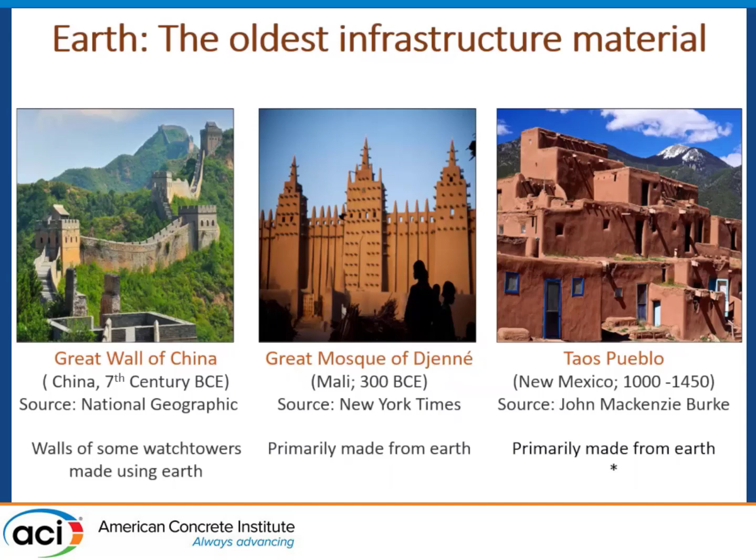Then we have Taos Pueblo, which is a community in New Mexico, and this also was made entirely with earthen materials. What's really cool about these structures is that, considering their long age, they are all still around and still presently in use. Particularly with respect to Taos Pueblo, it's considered to be one of the longest continuous use sites for humans in North America. So that's showing you the testament to the resiliency and strength of earthen materials, which we tend not to really think about as being strong and resilient.

When we look at earthen materials, it's actually used everywhere. Just about every continent will have some type of earthen architecture. Over here, this is showing you a map of where there are regions with earthen architecture, and you can see it's pretty well distributed. In addition, earthen architecture is not just used in warm climates, as some people may think. Over here, we can see this multifamily building that was built in 1955 in Germany.

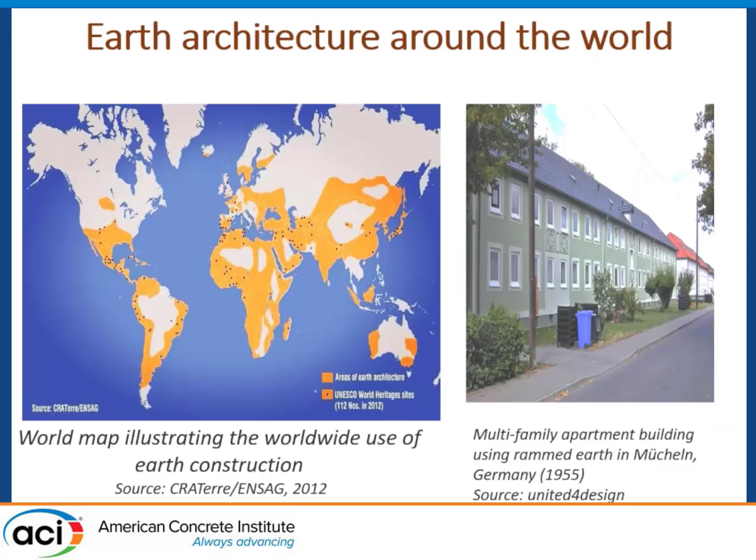When we look at earthen materials, there's many different ways that you can build an earthen building. Perhaps the one that most people are familiar with is adobe. Adobe is the type of earthen construction when you take soil, typically mixed with some sand too. You'll have it in a mold and just hand mold it.

Then we have cob, which is another type of earthen material in which you have your earth, your sand, and you also mix it with some straw. Then you have rammed earth, which is a type of earthen construction in which you have your forms built to a certain height, and then you put your soil inside of it and tamp it down, then you put another form on top, fill it with soil, and tamp it down again. A lot of architects like the look of rammed earth because you could add pigments to it and change the color of each layer, so you can have some really nice features with it.

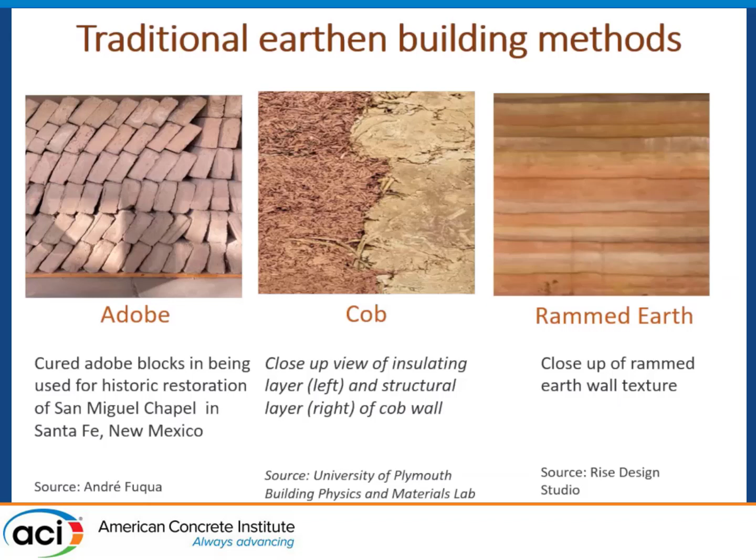Over here, this is just showing you some examples of each one of these earthen construction materials. However, over the last decade or so, there's been this renewed interest in looking at earthen materials. A lot of this has been driven by looking at trying to have economical, affordable materials with respect to housing development, to address concerns with respect to housing scarcity.

But in addition, there's a big motivation with respect to looking at how we can try to mitigate some of the effects that the building and construction industry is having with respect to climate change. And when we look at earthen materials, we see that they have a much lower embodied energy and carbon footprint than our beloved concrete.

So over here, this is showing you an example of rammed earth, which is one of the methods that I talked about before. And compared to concrete, we can see that rammed earth is going to be a fraction of the carbon footprint and embodied energy of concrete material. So this is a strong motivator, and you're seeing a lot of people who are really focused on sustainability looking at alternative materials to design their house.

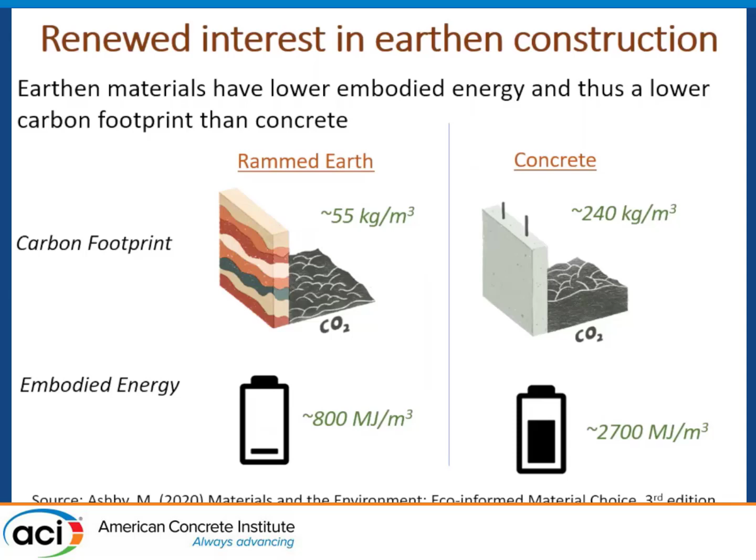This renewed interest in earthen construction has also led to a renewed interest in ways that we can manufacture earthen materials. So over here, this is showing you two examples. One is compressed earthen blocks.

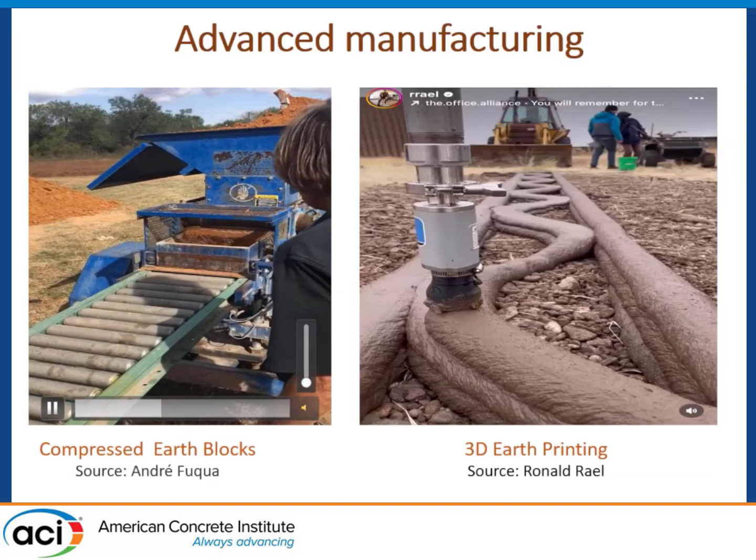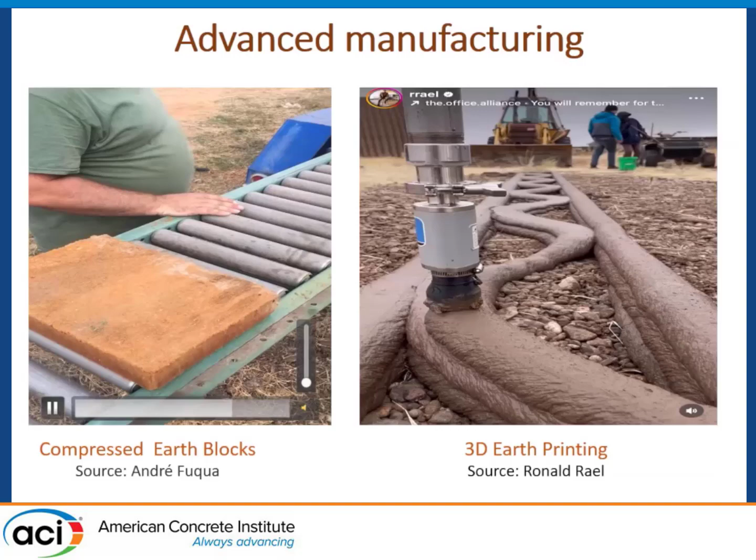Over here, this is showing you a video of compressed earthen block masonry. You can think about this like an extruded, free-form type of earthen construction. The soil comes in, gets compressed, and then it's extruded out. You can see when he picks it up, it has shape stability, it's well formed. In some applications, people build directly with it, but in many cases, you will actually cure it too.

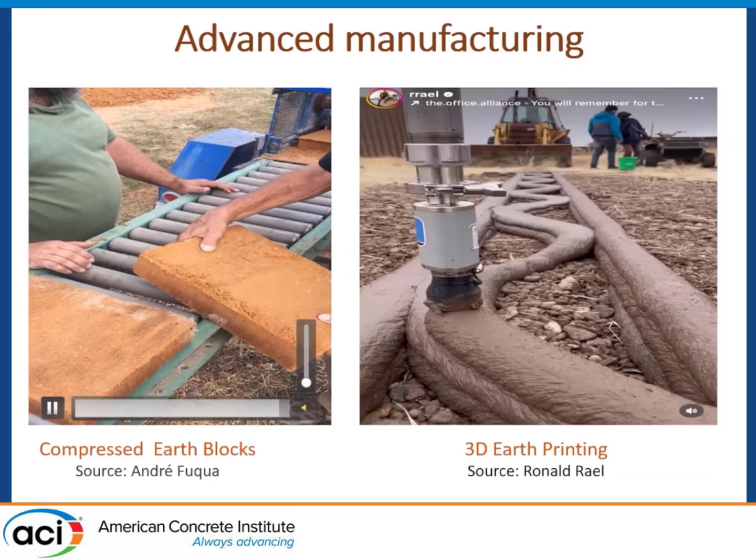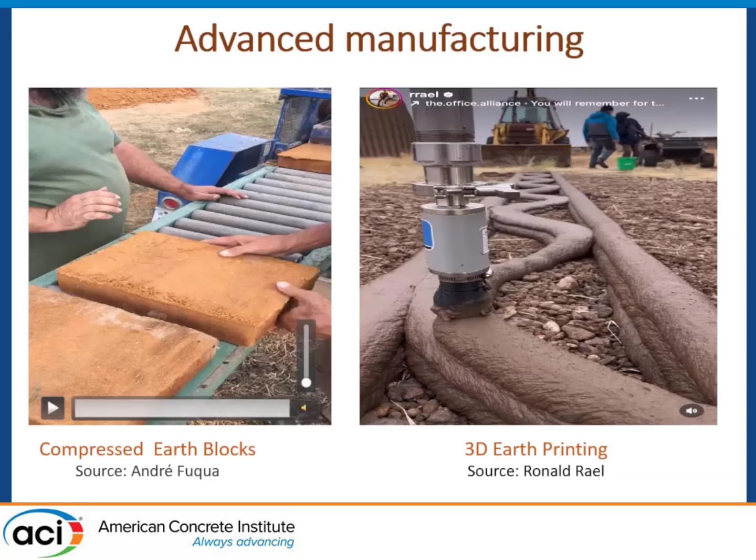So this is Jim Hallock over here, a big earthen contractor in the United States. And over here, this is showing an example of 3D printing with earthen materials. This is from Ron, an architect and also a professor at the University of California, and he's been doing a lot of work looking at using earthen materials from an architecture perspective.

However, when we look at Earth, it's unique and different than concrete, and there are unique challenges present with dealing with Earth. One of the first challenges with Earth is moisture resistance. We all know that when you mix Earth with water, you get muddy puddles, and nobody wants a home that's going to be a muddy puddle. But the great thing is that we have ways to address this.

And this is where our beloved cement comes into place. With earthen materials, in order to increase strength and water resistance, you need to stabilize it. If you want to use it for exterior use, you need a chemical stabilizer. The most common type of chemical stabilizer used is Portland cement. You do have other types of stabilizers such as lime and metakaolin, but cement is the one you'll typically see used in the field.

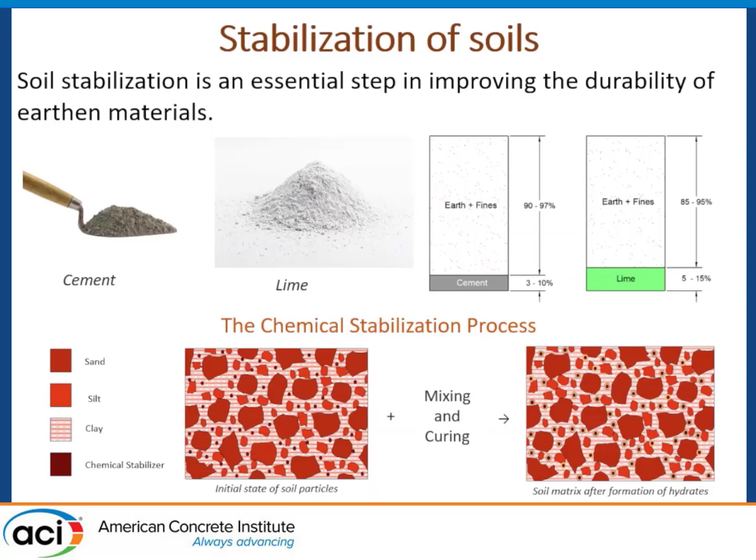Around 3 to 10% of the content of your soil would be cement. Similar to what happens in soil cement, which is a committee here at ACI, when you add cement to your soil and allow it to cure, you get that hydration reaction that forms the precipitation of CSH. The CSH then bonds to the soil particles, filling the voids as well as increasing the strength. So this is where chemical stabilization comes into play.

Another challenge with respect to earthen materials is safety. With respect to fire resistance, there have been a lot of studies showing that fire resistance is perhaps not even a big concern with earthen materials. It makes sense because when you heat earth, you're actually making it stronger. You can think about pottery and clays when you heat it up. So earthen materials actually have really, really good fire resistance.

Structural integrity is a place where there's a lot of work going on from the structure side. What has been found is that, similar to adding chemical stabilizers to increase water resistance, you can add reinforcement to it. There are various types of fibers that you can add to your earthen masonry in order to increase the strength.

There's geosynthetic materials that have been added to increase the strength. So there's a lot of work going on in this space.

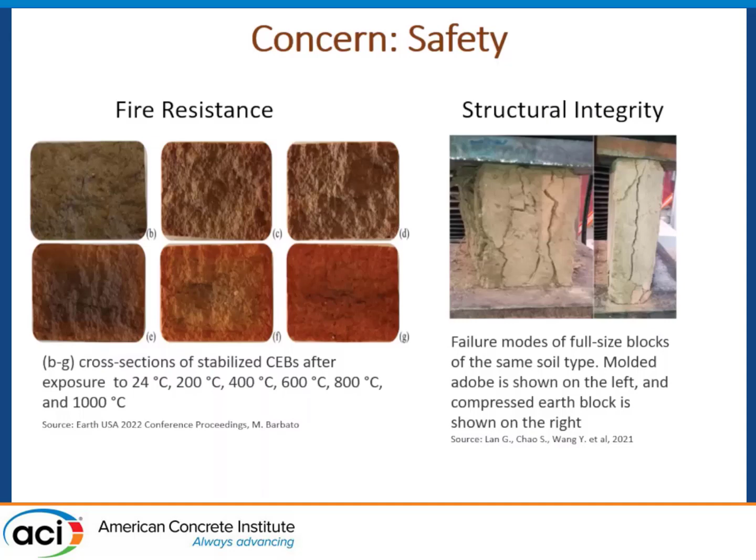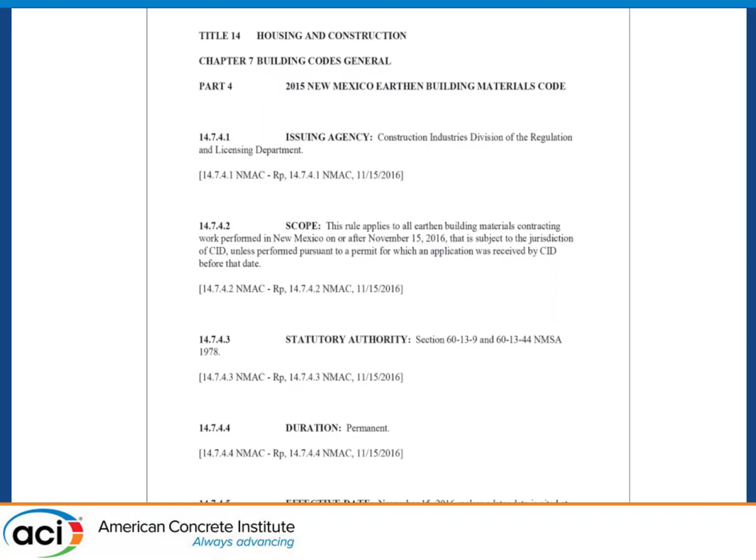There's one state that I'm aware of that explicitly addresses earthen materials in a building code, and that is New Mexico, which makes sense because remember that first slide I showed you, Taos Pueblo, they do a lot of earthen construction there. With respect to specifying the material, the soil must have a strength of around 300 psi, similar to masonry type construction, and must have a modulus of rupture of around 50 psi.

This is basically it with respect to material properties. Well, there's one more: it states for stabilization, you need to have 6% cement. But there's no information about shrinkage, nothing about plasticity limits or anything like that. It's just strength - this is your qualifier for having this material.

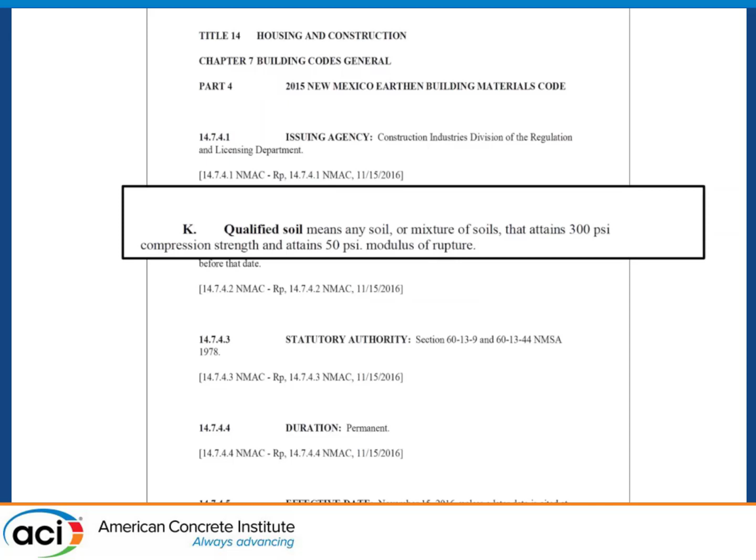Another challenge that we have is communication differences. I remember when I went to college, I went to Howard University in Washington, D.C. I'm from New York, we say soda. I started meeting people from the Midwest, and all of a sudden it was pop. I'm like, wait, what? Right? So it's this big debate over soda and pop. Right now in my household, we're having a debate over is it book bag or backpack. I say book bag, my kids say backpack. Same thing, right? But different terms for describing something.

And that's actually what's happening right now in the earthen space. When you talk to contractors in this area, they have a lot of methods that they use to try to identify soils, but the methods that they have are really empirical based.

This test is a jar test. It's actually pretty cool - you put the soil inside, add water, add a dispersant, and over time you'll see that the different fractions separate. They use this as a way to try to identify suitable soils with respect to clay content, but it's not like it's a percentage or anything - it's just, okay, we have a lot of clay, then this is good.

There's a shrink box test that I know one contractor is using as a way to try to identify suitable soils. Again, there's really no guidance there with respect to what is good or what is bad.

There's a cigar test, which is trying to look at plasticity - this is a thumb over here. You essentially take the soil, roll it in your hand, and you're looking to see at what point it's going to crack. And then there's other tests.

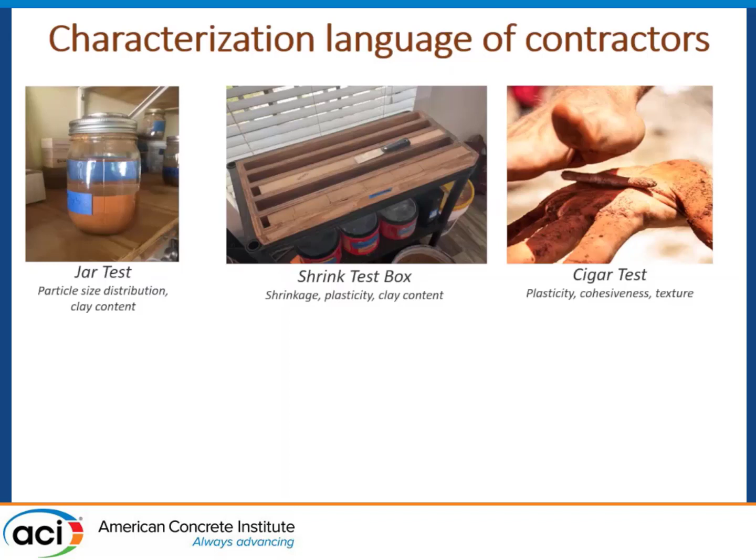The ball test is really used a lot in the field. This is to identify whether you have the right moisture content. So you take your soil, you would have added water to it, you squeeze it, and then you drop it on the floor. And depending on how it splatters, they're like, okay, this is good, this is bad.

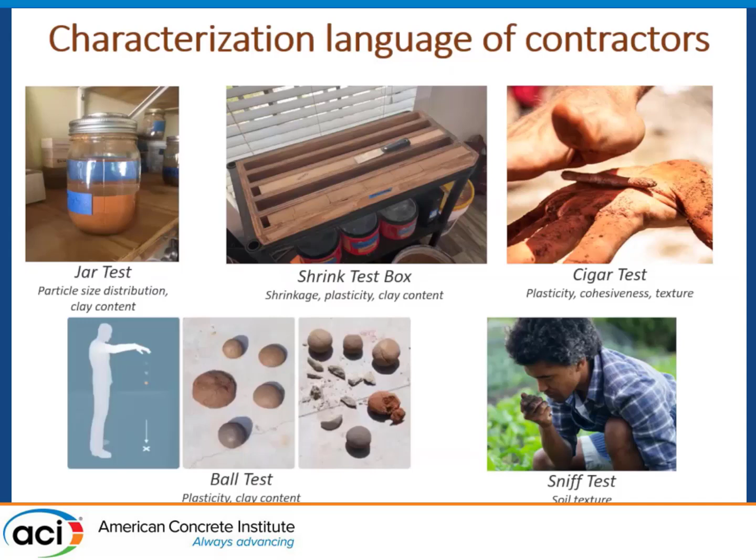And then there's even a sniff test. The sniff test is used in order to identify soils with respect to organic matter, right? So these will be some of the languages, the terms, the testing that you will see contractors using in the earthen building space.

And then when we think about engineers, if you're a civil engineer, you're used to geotechnical engineering tests - we're talking about Atterberg limits, we're talking about particle size distribution. We're trying to get to the same thing, trying to look at how much clay you have, what's the particle size of it. But it's a completely different language.

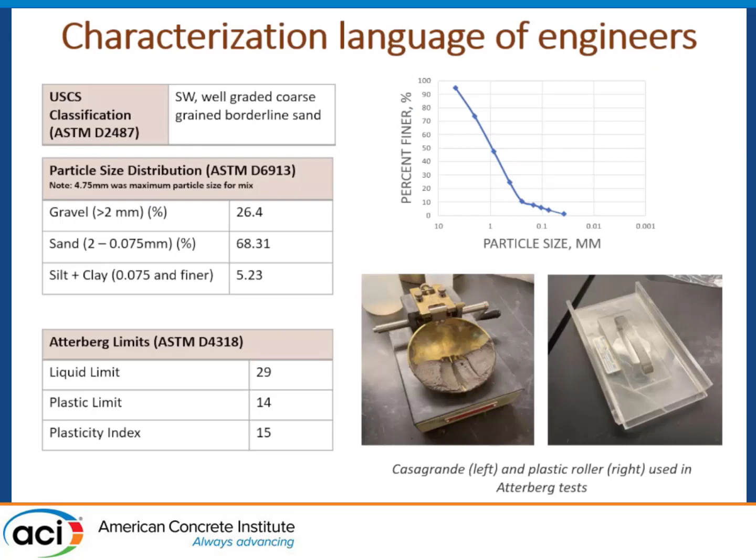And furthermore, even if we had all this information as engineers, we don't really know what to do with it. So a big challenge that we have is this link between the engineering properties and the performance that we need for earthen materials for building application. But this challenge presents an opportunity, and this opportunity is really looking at engineering earthen mix for building applications.

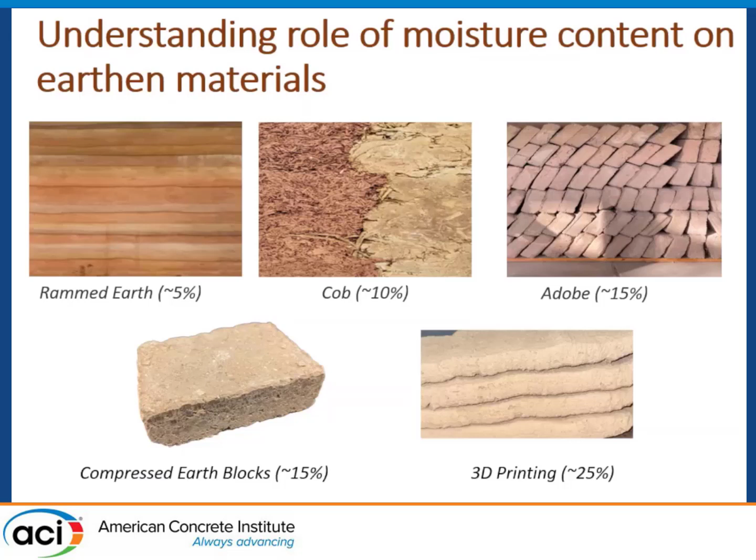One way to do this is to have a good understanding of the role of moisture content of earthen materials. I talked about moisture resistance, but in order to make these earthen materials, you have to have some moisture in it too. With rammed earth, you have around 5% moisture, depending on the soil type. With cob, it's around 10%. With adobe, it's around 15%. Compressed earth and adobe actually have similar moisture contents. And with 3D printing, you're going anywhere from 20 to maybe 30%, in order to gain the consistency that you need.

What we want to do at UT Austin is really look at engineering this earthen mix, the same way we have engineered mixes for concrete construction, and engineered mix for soil cement in foundation applications. We want to engineer this mix for building applications. So in our lab, we're gaining soils from various contractors in Texas, characterizing the soils, varying the moisture content, doing our typical geotechnical engineering tests, and adding different stabilizers at different stabilizer contents. Our goal is to determine the density.

There are different ways to determine density - there's a static compaction test and a dynamic compaction test. We're going to be looking at both of those types of compaction tests, because we're not sure yet which one is best representative for building construction applications.

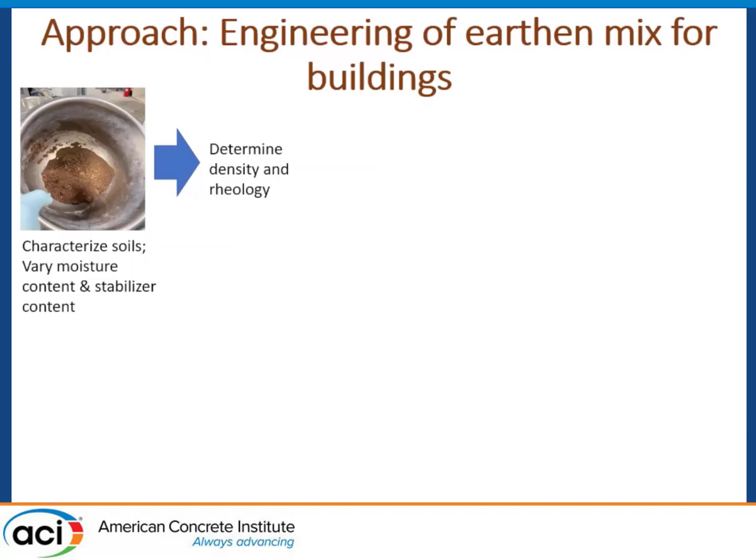Instead of doing something like the ball test, we really want a quantitative test to characterize the consistency of these mixtures. So we're going to be looking at the fresh state properties and trying to tie them to rheological parameters, for these two modern types of earthen materials: compressed earthen block construction as well as 3D printed material.

We're doing various types of characterization tests, from strength to moisture resistance, looking at porosity and permeability. We've got some really interesting work looking at indoor air quality. One of the benefits of earth that's different from concrete is that it's considered a breathing material, a living material.

I was really interested in whether we can use earthen materials as passive removal agents for some toxins in the environment. What we're finding is that it does a really good job of removing siloxanes, which is basically a VOC emitted from human health products. So we're also looking at how you can use earthen materials to remove toxins indoors. Our real goal is to link these various performance measures with density and rheology so we can come up with parameters for when you have a good performing material.

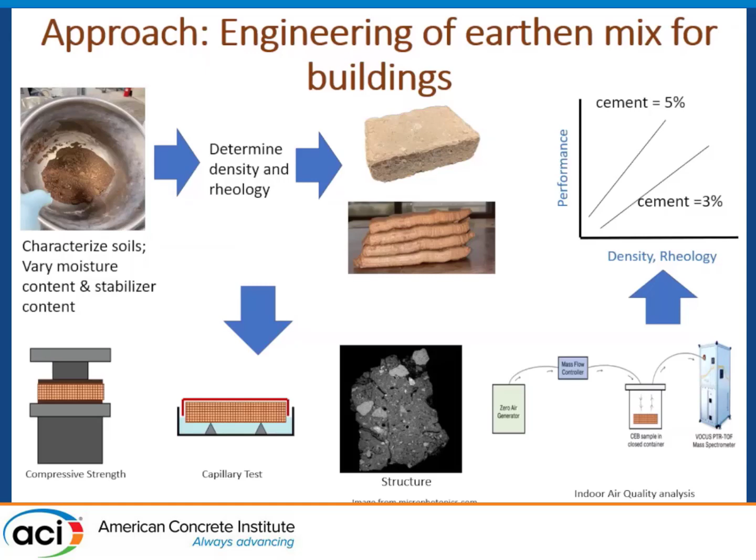In conclusion, we see there's renewed interest in earthen materials, and we know earthen materials are used all over the world - around 40% of humans live or work in an earthen building. We know that to really advance this field, you're going to need chemical stabilization, which is needed especially for exterior applications of earthen masonry.

Truly engineering the mixture - understanding how to identify suitable soils and how mixture design impacts the properties - is an opportunity in this area to advance the use of these materials. So it's no longer just an art, but more so an engineering practice.